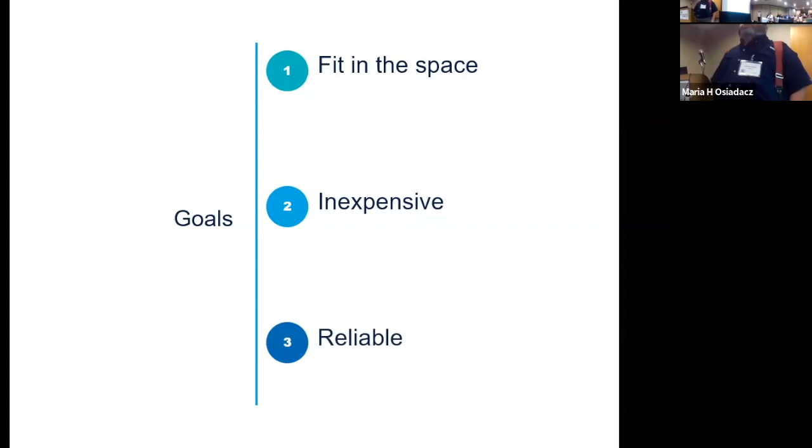50-50 on that one. So for the design, our constraints were really around the space. We were very height limited, and I obviously can't change anything about the valve or the structure of the ship or how high it is. They wouldn't let me flame torch a hole above where that valve is so we could go higher. I don't know why.

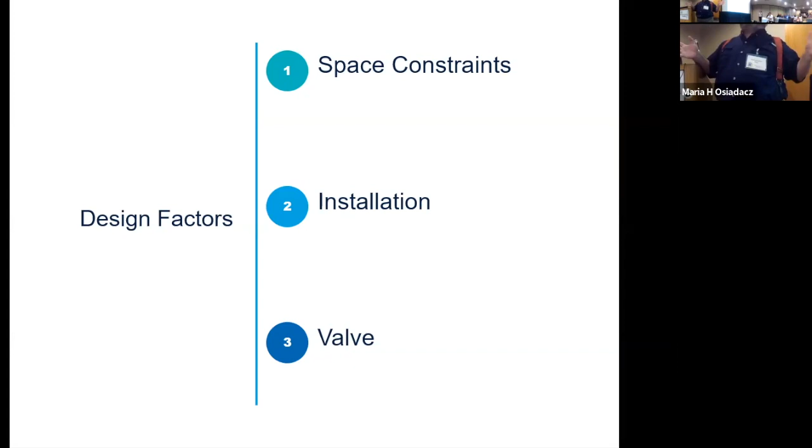The next thing was it has to be able to be installed, which is, well, I guess important to have it be installed, and again it was a very challenging thing to do. The last factor was the valve we had to install it on, which was a 20-inch gate valve, giant thing, bottom of the ship, terrifying to open up. If you see Emily Chung walk around, she has a t-shirt that says 'What's the worst that could happen? The boat sinks.' This was actually that project.

So we went through a couple of different iterations on the design, and it turned out this first one is the part I liked the best. The box was the easiest way to get transducers in and out, and we needed the least height. However...

Again, due to installation parameters, we couldn't get it down to the transducer room. I had, turns out, about a 20 by 20 inch square that everything had to fit through. Either that or the ship had to come out of the water and we had to come up through one of the larger transducer holes, and everyone was like, 'You can't do that, Josh.'

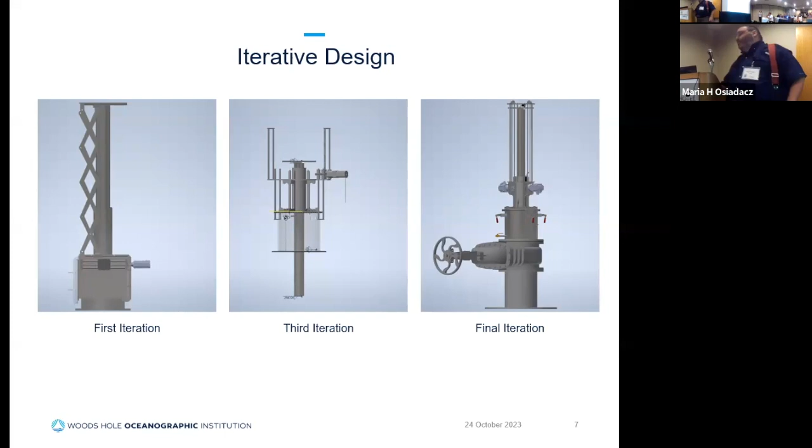So our final design ended up being a fairly robust, fairly simple system. However, when they first look at it, they don't understand how you can get a transducer in there. You just have a cylinder and a lid, and a piston that goes up and down - there's no way to open it.

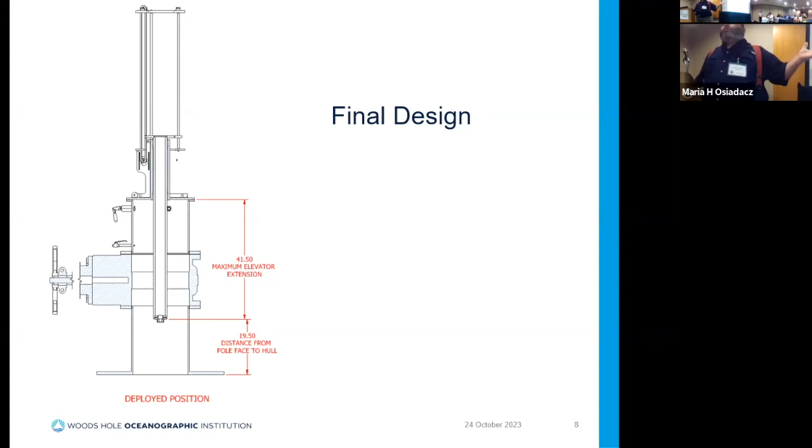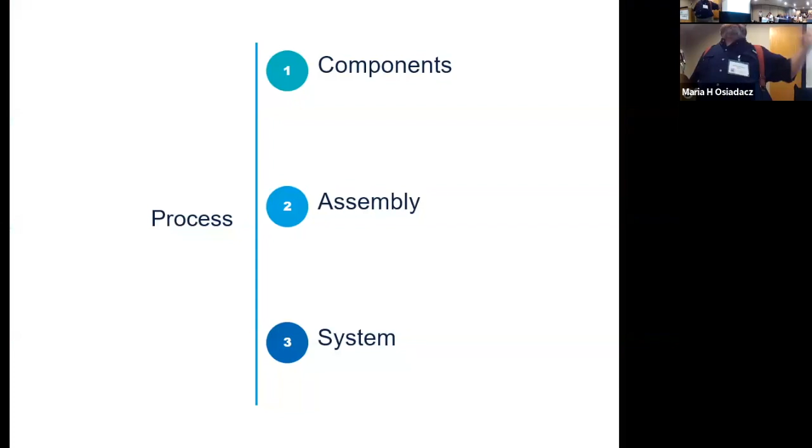We'll get to that. So the process I took was, obviously as an engineer: first design, build it - but the interesting parts were getting the components, testing them, testing the assembly, and then testing the entire system.

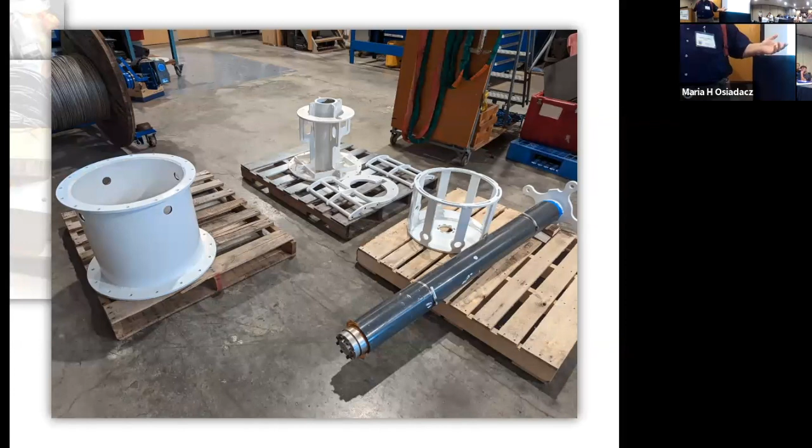Let's see if this works - yeah, so this is going to shoot through all my pictures, and we have a whole bunch of neat things going on. Maybe I made this go too fast.

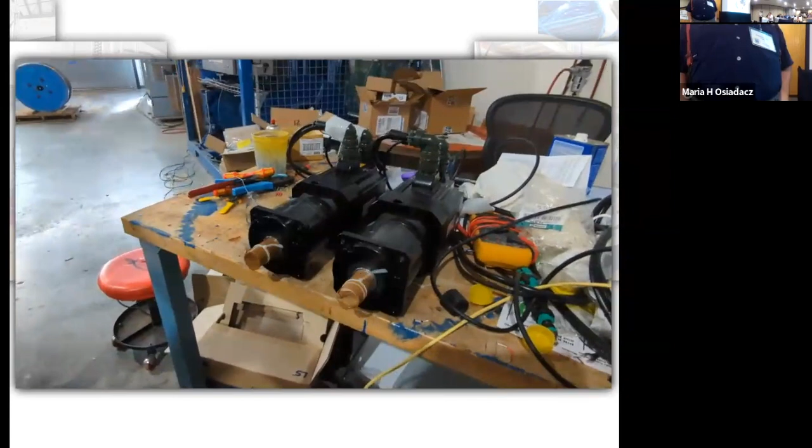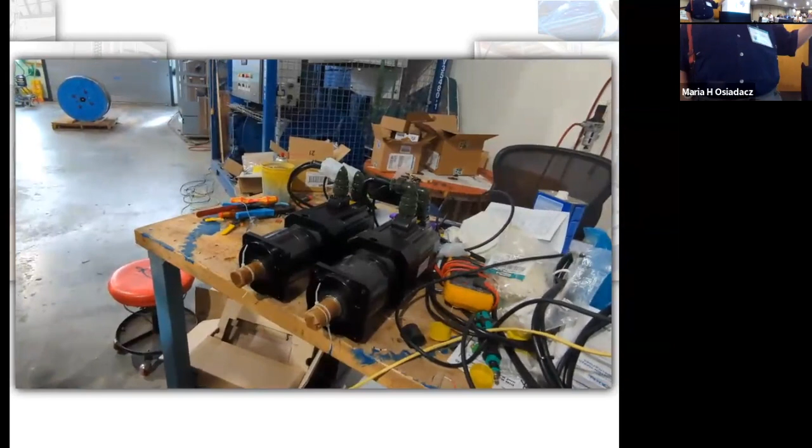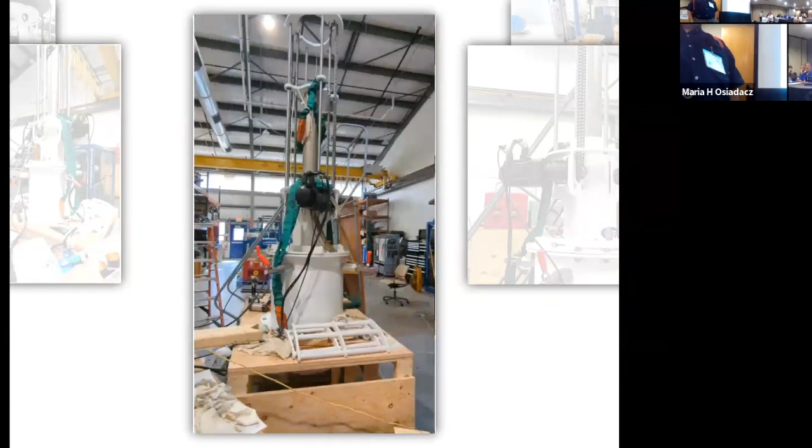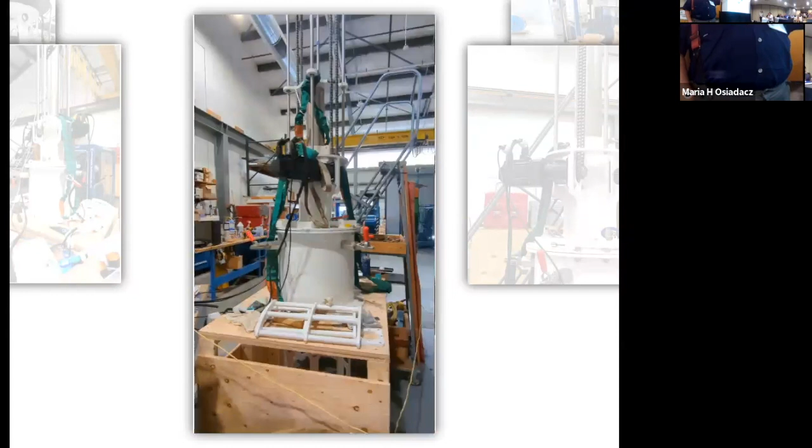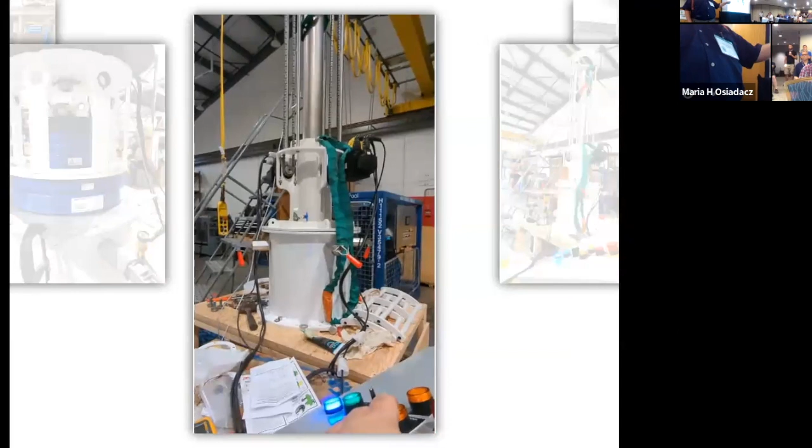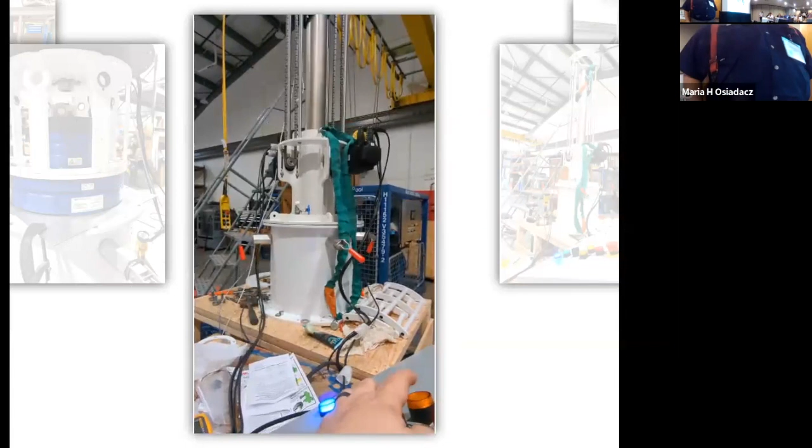When it goes up and down, that's exactly what you want it to do. The next one is going to show us how it opens. So this part is kind of neat. On the side, there are 4 locks that go into a cage, and the elevator then lifts itself up off of itself. Those 4 points of contact are quite rigid, so we don't have any movement. Then, of course, I had to test it with the transducer installed, and my worst fear came to light—we couldn't actually move with the transducer installed, because I was surprised at how heavy they are.

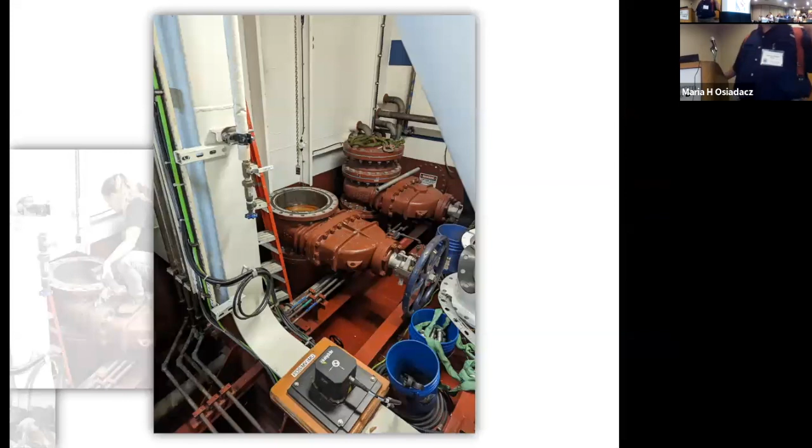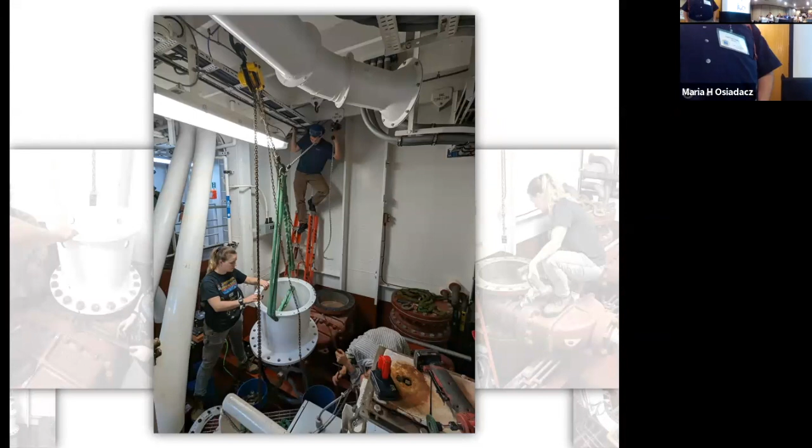So next up, these are probably going to go by fast too, so I'm sorry. Our installation, you can see there's the large valve, and this valve hadn't been opened, so we had to clean it off. Here's the space that we had to work in, which was not that great. We managed to get everything over and in place and assembled.

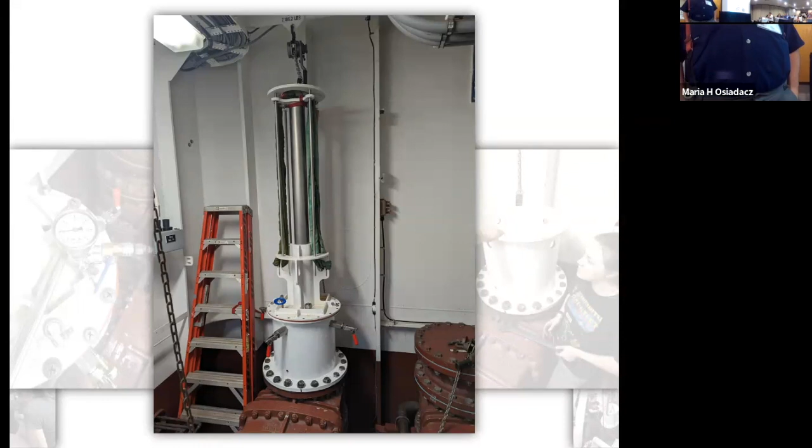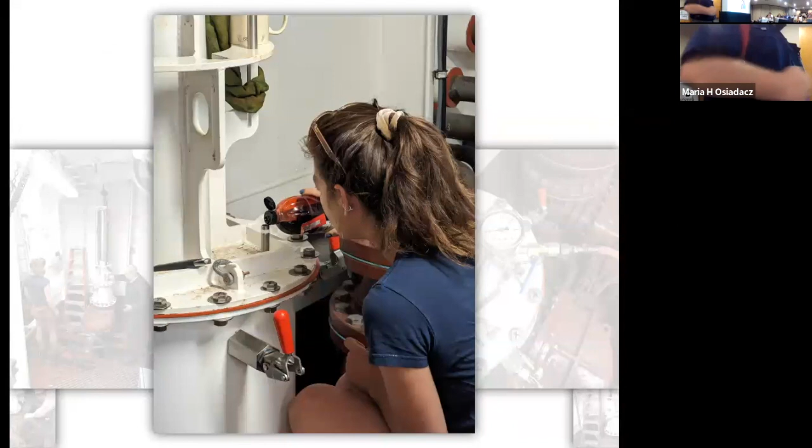And then came the testing. This part I was not prepared for—that the ship was going to want to test everything and had to hold pressure for 24 hours. I was like, let's go, let's move on to this. So we tested with air, then water. We used a dye in the water just to see if we saw any leaks. And the answer was no, we didn't see any leaks.

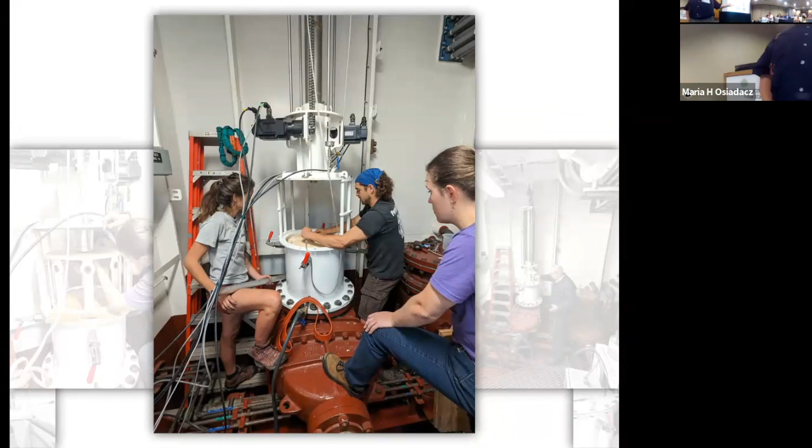Everything's great. And then we tried a crack the valve test, and we let that sit overnight. So like 3 days of me doing nothing. And I'm like, I want to get more done.

And eventually we did get to the point where everything was assembled, and you can see the elevator is fully deployed. On the left-hand side, you can see the top, and here, top is up. So that's kind of the brief overview of our installation.

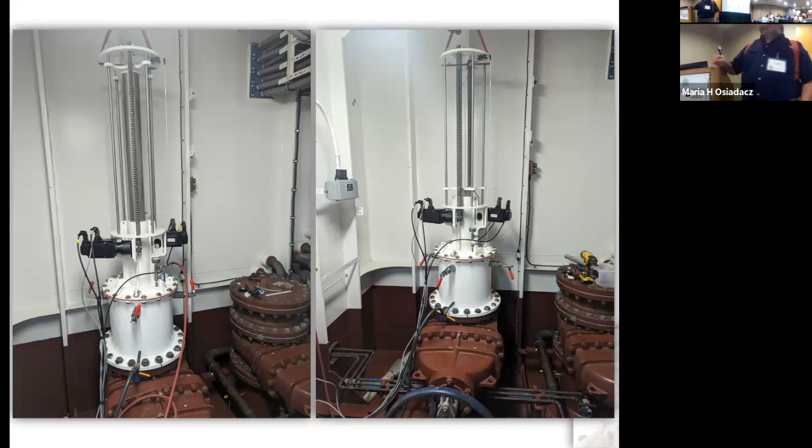Now, I didn't get a lot of pictures after this point because I was the person running the controls. We had some unreliable encoder communication, which was troublesome for the servos. For those who might not know, a servo motor just has position feedback on it. So it's not a servo if it doesn't have that on it, and then it doesn't know where it is, which is a large problem for a system like this.

We started to get that straightened out, and then we ran into an issue where I was being a keyboard warrior, and she touched the system and got a shock. She said, Josh, did you ground the system? I said I grounded the system. I mean, we are on a ship, so there's no ground, but that's a discussion for another day. It turned out the electricians on the ship didn't connect the ground, or it came loose. I'm not going to cast any blame.

It turned out that was a lot of our problems—we were running ungrounded, and so we were getting a lot of noise where we shouldn't have been getting noise. Then we started getting overloads. These three things together ended up damaging a couple of the motors, the original motors. The brakes weren't then turning off, and then we were trying to haul against the brake, and that doesn't work.

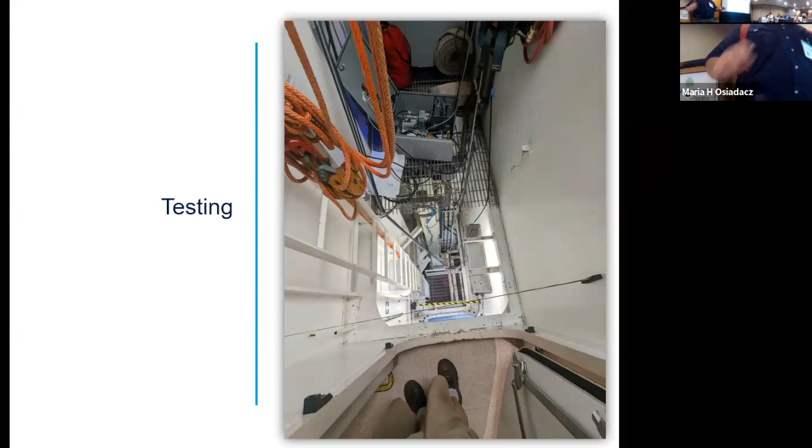Some of the weaknesses of the system were—there aren't any. No, I'm kidding. I'm blanking on what I wanted to say here. It's not as easy to reconfigure the position as I wanted it to be.

Again, version 1.0, I don't have a user interface on it. I have a couple of buttons that say go down and go up, and then you can switch it to manual go down and manual go up. The automatic modes will bring you down to the exact same spot every time. You can say go up, go home—it goes all the way up, and you can put those locks in, system secured—or you can hit the deploy button and it goes down to the same spot every time.

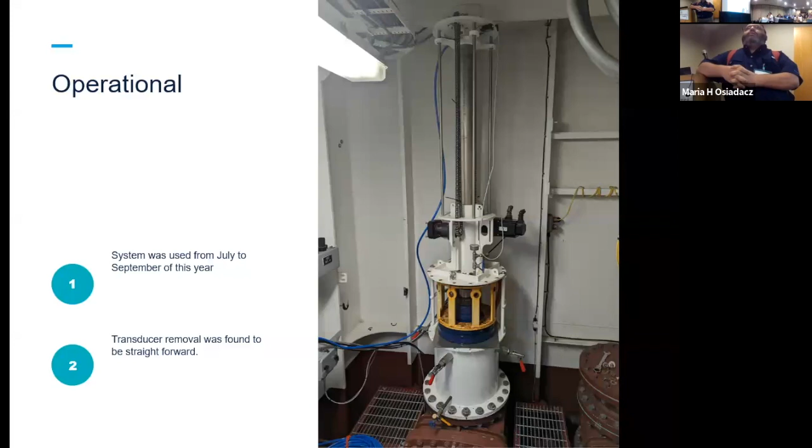We just removed it right before I flew out. Took about half a day to do the removal. We didn't have to pressurize the space we were in. It was quite easy. Yeah, everything came out pretty good.

So for the future, one improvement is to make it user configurable. I think it should have a little screen where you can say this sensor is X tall, and I want it to stick out 2 inches, or I want it recessed 2 inches, whatever it happens to be. That should just be something you shouldn't have to call me for, and I shouldn't have to go into the PLC program and say, nope, we're really going here.

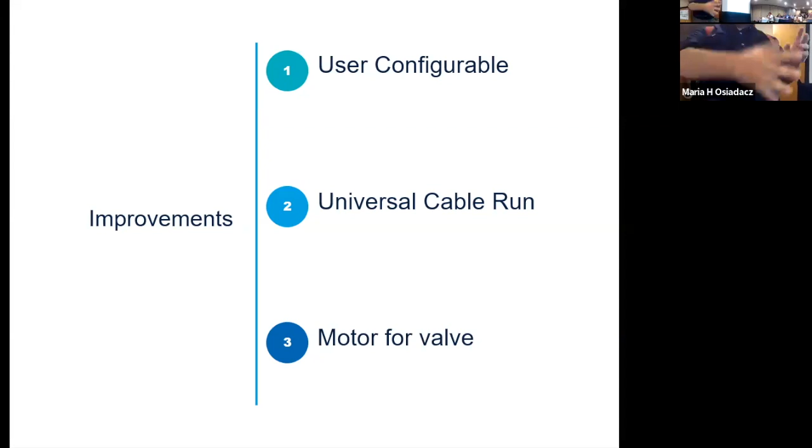The next thing would be a universal cable run. I found a gland that I could fit the deck cable connector through, which was great because no one wanted to disconnect it, and we didn't have to cut the cable. The downside is we had to pull through maybe 100 feet through the whole thing because we couldn't go the easy way.

So we want to put in a universal cable run that brings you from the transducer room up to the server rack, to the whatever they call them—I can't remember.

And then the last thing would be a motor for the valve itself, because they're very fine pitch and watching them... because I'm an engineer, I work. I kid. Spinning the valve was terrible, it's like a day, you're just there turning. All right, it's not that bad, but having a motor on the valve would be useful.

And then we could do a type of lockout—we'd know if the valve is open or closed. It would certainly speed up the process to deploy and retrieve the elevator each time. Yes, they have to count the turns to make sure it was closed all the way, or notice when it didn't turn anymore. But sometimes they're old and get stuck, and then you think it's closed but it's not. There isn't a visual indicator on it that shows where the travel is—that's a fancier model.

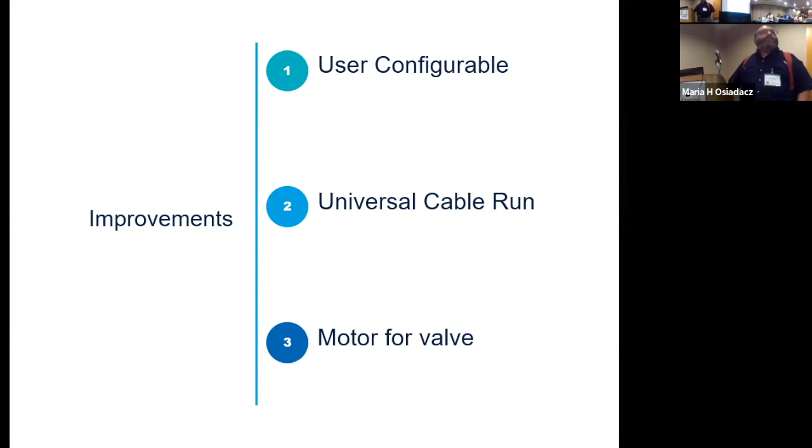Any other questions, comments, concerns? Yes—you have a valve for the air out, for the transducer, so you don't get air trapped. That's another thing that will be implemented in version 2.0. I've been looking at automatic air burping systems, but we do have a valve up on top that can manually release any air that gets entrapped. Actually, the way we empty it is we plumb air into the top, crack the valve, push the water out, and that has worked relatively well.

What about how far below the hull it was going, like what rating of speed did you design this all for? So it was designed to go flush to the hull, but—probably my fault—there was a measurement missing in the drawings I received from the ship. Long story short, we were 2 inches short, so we didn't extend beyond the hull. Ideally, had it been 2 inches the other way, we would have been 2 inches below the hull.

There is a plan to remedy that—if we use the same transducer, we can attach an extension onto it to drop it further down below the hull. At those minimal extensions, there aren't really any design limitations, but there may be practical limitations from cavitation, Kármán vortex shedding, and the like causing vibrations. But it is very stiff once assembled and deployed.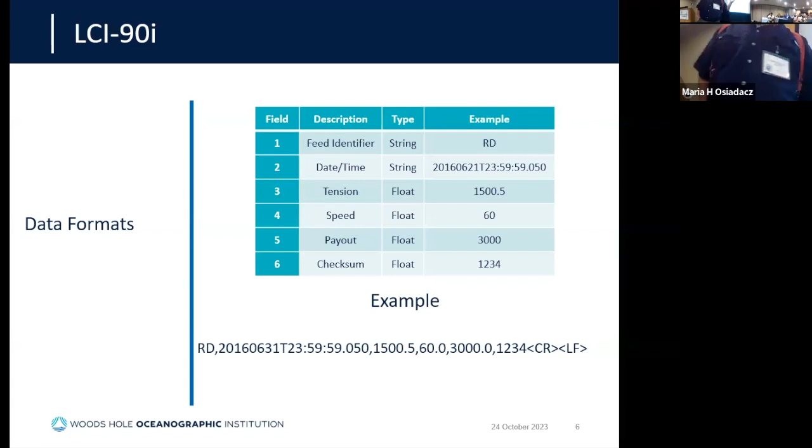So I have a couple of data formats that some of us might be familiar with. So this is the legacy format. And this is MTNW1, I believe, from they're now Rugged Controls, and it's output by all LCI-90i's. So that's one of the formats we're dealing with. From that, I came up with the UNOLS string that includes a little bit more detail.

Close to having a tension event, or when we do have a tension event, so that we can look around that area sooner. So if we have one of the bits in the warning or the alarms, I can't remember what all 7 or all 8 of them are, but they would tell you something about what's going on with the wire, and you could then look back and look at the data around it if you needed more information.

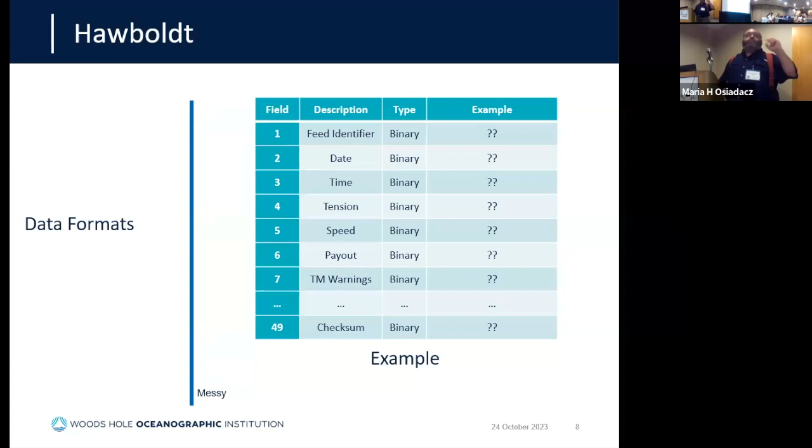And then there's the Hawboldt format, and I did not include it because it was really tough to get through. And every Hawboldt, not every series of Hawboldt winch has a slightly different format. So those are the main 3 that I've been dealing with. There's a few others.

So now getting into the features. What can it do? Why would you use it? The biggest one, time plotting, that meets Appendix A at operator stations.

It logs the data. So all of our winches can internally log the data, but if the ships want the data, you guys can log it yourselves. It can also provide a remote display, so if you wanted to add a display up in the bridge, et cetera. And it can also provide conversion from one format to the other, maybe from a couple of formats to a couple of formats. I'm not 100% going from all different.

So a lot of that is to bring in that portable winch data that's been normally left out on the deck into the lab, and allow that to be seen by whoever wants to see it. I know that the Endeavor has used that quite a bit for a number of our winches doing casts on board, and it has been fairly successful with them.

Like I said, it really makes it easy to get those cast log files where you can just pull out the max and min values, and it can add additional displays in other places, and convert TCP, UDP, serial feeds, all the like.

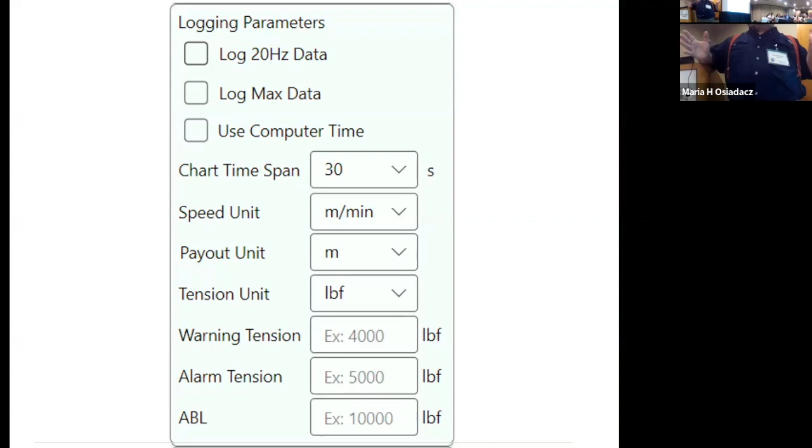And then you can put in your Appendix A parameters for your warning tension, your alarm tension, and your breaking load. I don't know why I included the breaking load in there because that's not used anywhere.

The next thing is you can configure your output data. So you can send the UDP data, send serial data, add or update winch will do the right thing, and remove winch removes the winch.

And when you finally get your winches in place, if you use a lot of East Coast Winch Pool winches, you could set up each of our winches with their name and assign them a permanent IP address. You plug it in and it'll be automatically populated in the list. And if you need to make changes, you can.

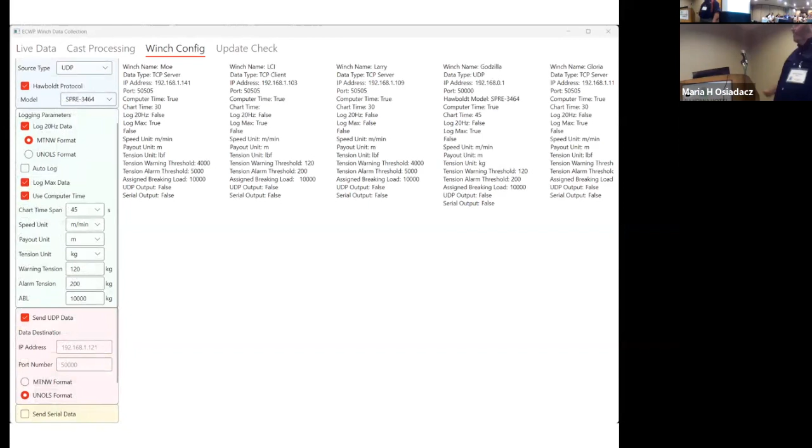You can then set it up to record the data as needed.

One thing you can do is resize the amount of room. You can select how many winches you want, but that's going to be governed by how big your screen is, how dense your pixels are, what your resolution is.

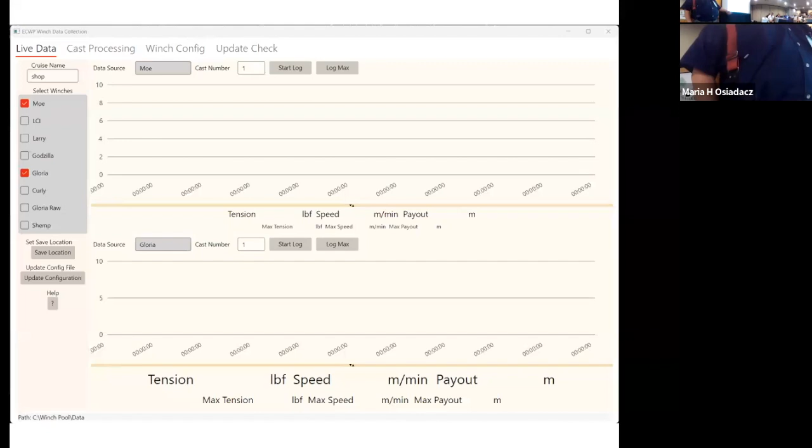One looks really good in my opinion. Two looks okay. If I made my default text size too small, you can resize that area to get a little bit bigger text. The lab, you don't have to be sitting in front of it.

And last thing, save location, and that's shown down here. There is help. I don't remember when I last updated it, so this might be for a previous version.

And then there's the cast processing process, but that's really boring. And I pressed spacebar too quickly.

If you're using the logging or the max log in the program, you don't really need this. This was more to process the log files produced in our winches. So it's kind of more of a historical feature if the program's not being used, and I really only wanted to have one program and not two.

But you can set what the minimum payout is to start a cast and end a cast, and what the tension is to start a cast and end a cast.

And Lynn just showed up in the back, and she can tell everyone how great this program is and how much she detests every time she has to use it.

Very useful, and one thing I like best is that you're so responsive to requests for change or edits.

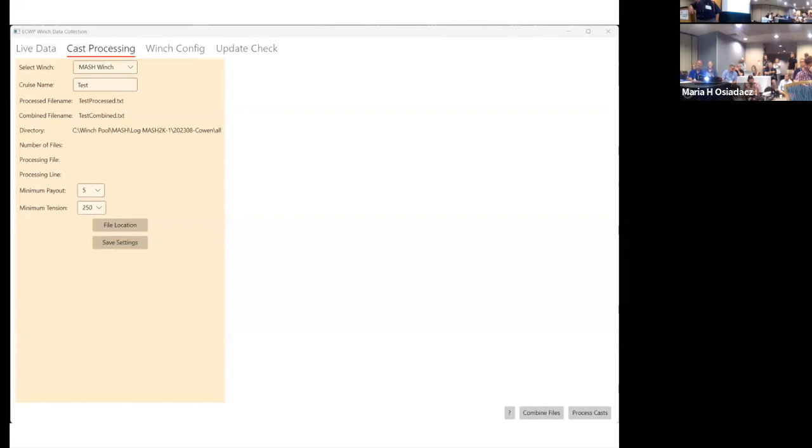Also for sending out a signal via UDP to someone else on the ship. And one thing I need to test is to see if we can send from this program to this program. Instead of trying to connect multiple computers to the winch, if we could set a single one of these up running in the lab, then you could broadcast it to as many stations as you needed. So that will be on my to-do list.

Any other questions? Yes. Oh, you great, have this so it fills out a running use log. It does not automatically do that.

So if you hit the log max button, it will log that cast, advance to the next cast, and be ready, resetting the maximum values. You don't have it shifting over to an Excel file that does the running use log additionally. No, I just keep track of what the maximum value is during a cast and then log that.

Yes, so this is a data acquisition system, so I understand that correctly? Yep. So who is using this data and how is it being used? Great question, Rick.

It's telling us, and some of that format is very difficult to handle. Yep, we're looking at those maxes, max depth, max tensions, depth or depth at the time of max tension. And we then go back and look to see if the user is using the cable within their specified safe working load limits.